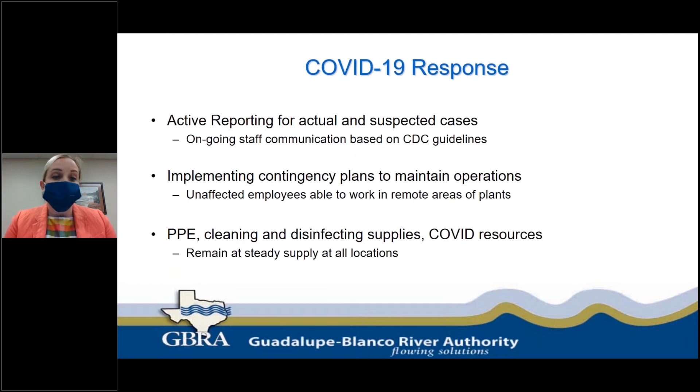And where we cannot delay or postpone tasks, including working with contractors, we have team members wearing face coverings when they're working next to other individuals. We have a steady supply of PPE, including cleaning and disinfecting supplies at all of our locations, but we do continue to stay on top of our inventory, making sure that we have a bountiful supply at each of our sites.

Our GBRA operations, our lobbies continue to remain closed to the public, and those that can telework continue to do so. We've kept a shift rotation for those reporting to work to limit personal exposure and potential virus spread. We still urge staff to conduct telephonic and remote meetings as much as possible, and in those we limit the capacity of each conference room.

We are continuing with our self-health questionnaires before we report to work, as well as temperature screenings and checking prior to any entrance to offices or field sites. We are maintaining weekly cleaning and disinfectant measures by our professional services at our sites.

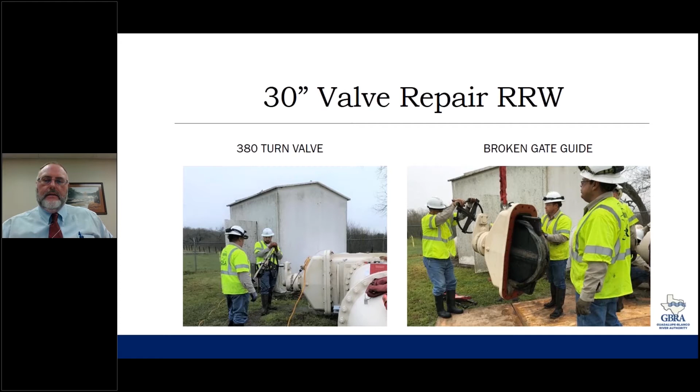First thing I want to cover is a 30-inch valve repair. This is on the regional raw water line close to Clear Springs at the pump station on Lake Dunlap. We had a valve that went bad when we started a pigging operation this spring. The valve shown to the left is a 380-turn valve. Since our guys don't have all week to open that valve, we have to put an actuator on it to help turn that valve. What we had leaking by was a broken gate guide at the bottom.

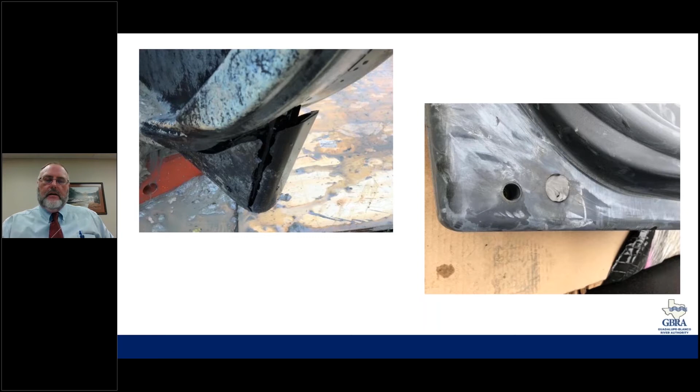The next picture shows what that is. It's a plastic guide that, because we had some debris and mussels in that valve - one that's not used all the time - caused some pressure and caused it to break. You can see the new one replaced that. We did this with in-house staff. Some of the parts we bought, and we had a representative from the company help us put that on, but it saved us a lot of money doing this in-house ourselves. We've come up with some protocol to clean that valve periodically and exercise it so we don't have those issues again.

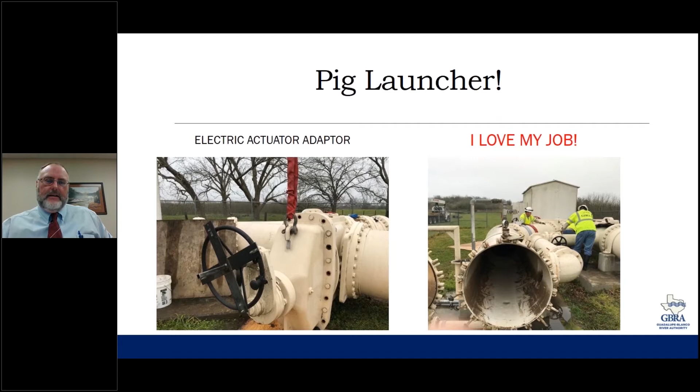You can see the adapter to the left. We put an adapter here so the electric actuator can mount and turn that valve. In red, you know, I love my job - how many people get to say they have a pig launcher in their business? I don't know that that's the proper term, but when we pig the line, which is like putting a giant Nerf ball in the line to clean out debris, we have to put that in there - it's very similar to a submarine tube. You can see the piping around. We close the door, put the pig inside there and push it through, and it goes basically 24 miles to the San Marcos water treatment plant. So it's something that everybody can't say that they do.

We had used it at the GPP pump station as well, and we've done some more inspections on the lower gates at Western Canyon. We'll use it for tanks and other things to help us save money. It's also good if we need to see something in one of our facilities, we can do it right then.

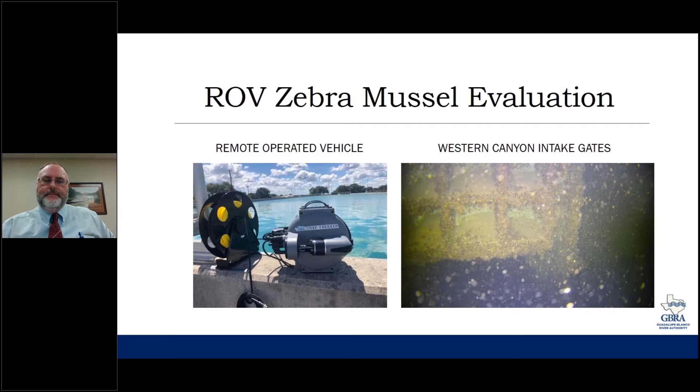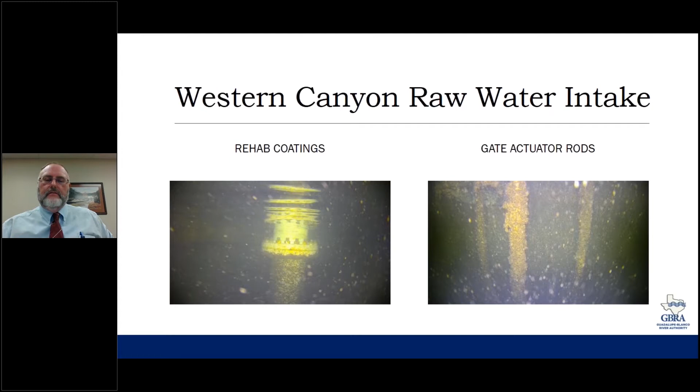You can see the zebra mussels on some of the pipes down there. They're not causing us any problems. The infestation you see here is on a steel rod that operates up and down, so they're not causing us any problem with operations, they're just there. On the left-hand side, you can see on the bottom we have a bunch of zebra mussels, and the top part we don't. That's where we had rehabbed some of the pipe and put a new coating on it. The coating does help keep them off, but eventually you can see through there, they will cover that up as well.

So we're working, engineering department is helping us, and we have hired a consultant to develop a plan for mitigation. What do we do now that we have the zebra mussels? It's not if we get them, we do have them. We worked together a plan with some contractors to remove the existing mussels before we do any chemical treatment, and we're looking long-term at adding a chemical treatment to prevent them from building up on our infrastructure and causing issues.

The reason we have to remove them is the chemicals we'll use will not only keep them from forming, but will kill the ones that are in there, and we need to remove those so we don't have a taste and odor issue like happened in Austin about a year ago. So we're ahead of the game and learning from others' issues.

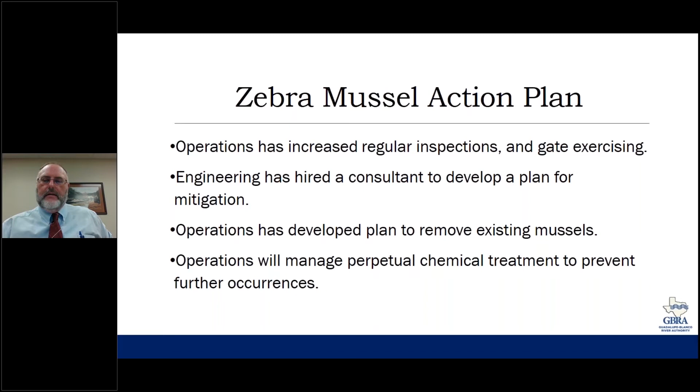So, Stein Falls Regional Lift Station. Stein Falls, as you may remember, is what we used to call the Dunlap Wastewater Treatment Plant. We've changed that name because we had too many Dunlaps. So it's that system run by Rudd.

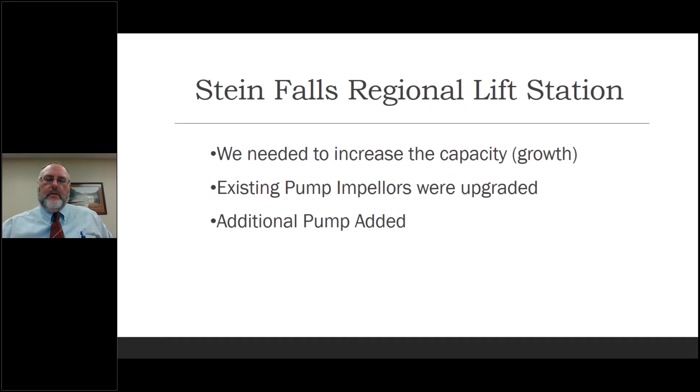With the growth we have out there, we need to increase some capacity. So working with engineering, they selected larger impellers, and we put in those pumps to upgrade them for capacity and added an additional pump for growth. To do that, we did it in-house.

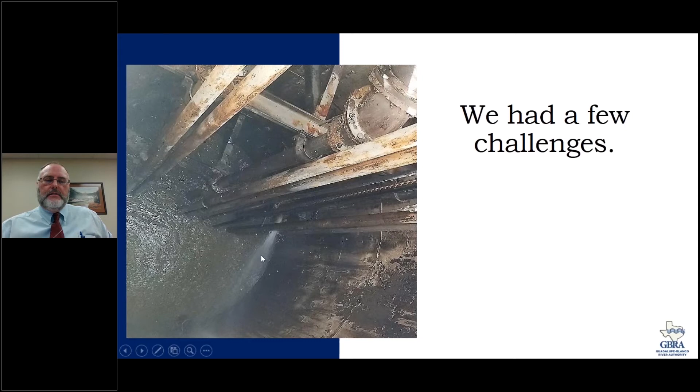And like all projects that look good on paper, we end up with a few challenges. As you can see down at the bottom, we had some water shooting out one of the pipes. So what we had was corrosion, and you can see some of the holes in the pipes, a hole there and a hole against this flange from the ductile pipe that was there.

On the right, you can see rags - baby wipes, paper towels, different sanitary wipes that people are using. They say they're flushable and will flush, but they don't go away. So they wrapped around chains. If you look to the left a little, you can see a guy standing there to give you an idea how big that pump is and how big this wad of rags is that's wrapped around there, getting caught and everything.

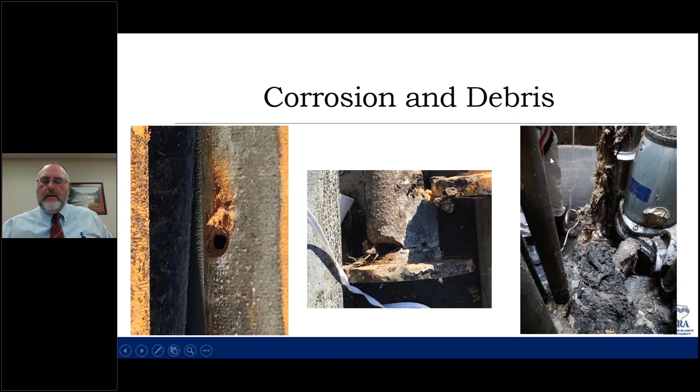So our solution, we brought our in-house crews. You can see the tube to the left coming out here where the mouse is showing - that's off our combination vacuum truck that we bought this year. The tube on the right-hand side goes all the way down to the bottom, and there's the hard hat of the man that's down in there. We cut up those rags, cut up the debris, and were able to suck that out of there to clean it out.

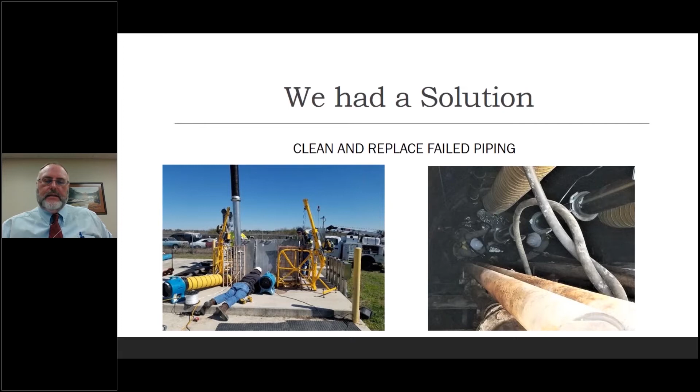You can see the cable and the harness as well. On the top left, you can see two blowers - we always have two blowers anytime we have anybody in a confined space, in case one fails we already have another one operating. You can see the hoist and winch we have for safety, with continuous air monitoring. The guy laying down is monitoring gases to protect the staff, and we're bypass pumping around it at this point.

So a few things that we did: we fabricated a drop tube, shown in blue, the new PVC. Originally from the top, the water just fell into the lift station, and that splashing would cause some off-gassing, which caused some of the corrosion we had. So we developed this drop tube setup, built it in with stainless steel brackets, and our guys welded and fabricated that.

It takes the water down to the bottom. We also, to the right, replaced the discharge piping from the pumps up with HDPE, high density polyethylene pipe, with stainless steel guides as well, and that'll help with the corrosion until this lift station is ultimately replaced at some point.

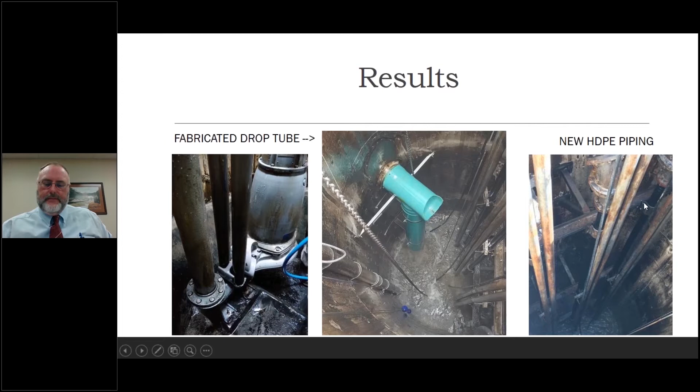We've had one inspection recently at Singing Hills, that was back several months ago. No violations were noted. All of our water and wastewater plants are meeting their parameters. We had a couple of exceedances recently, one on some flow back when it rained. We got some pretty big flow, so we had a 2-hour peak, but nothing major that's going to cause long-term compliance issues. And all of our tier 2 reporting for all the locations for large volumes of hazardous chemicals, specifically usually chlorine.

Something that's new is they're looking at doing virtual inspections, which is kind of a new thing for us. Basically they're going to review records from their office. We will send them things, they'll give us a list of things, and it'll be kind of a paperwork review on some of our water plants. The good news is they won't do that if they thought there were major problems. If we had a history of non-compliance or not meeting requirements, we wouldn't get to have a paperwork video conference review, so that's a good sign for us. We've got one set up for San Marcos water treatment plant and Luling as well, coming up in the coming weeks.

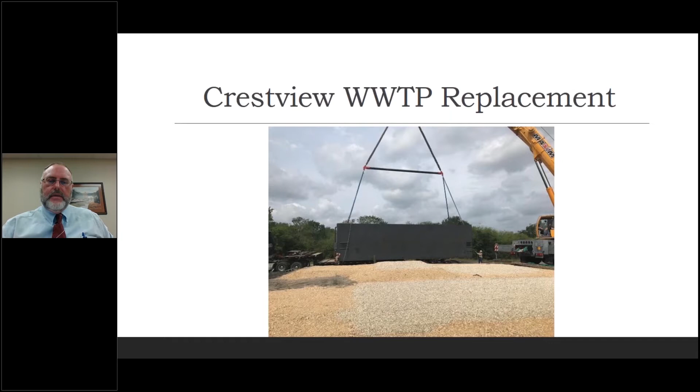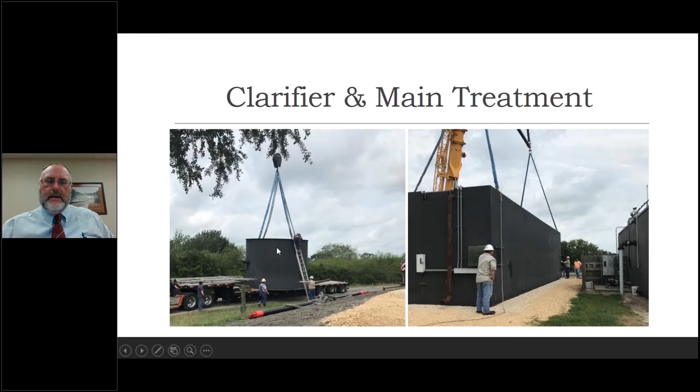That's the largest aeration basin digester. We had a pad built by contractors, built up a little bit higher. To the right-hand side you can see the old plant, and this one's a little bit higher than the other for storm waters and stuff, to keep water off of it as well. And you can see them setting it down. The clarifier is the round tank to the left coming off of the truck.

We have a crew, a couple of guys that are very good fabricators, who worked on pipeline crews before they came to work for us, and they're putting in the catwalks on top to reestablish those. Then the walkway across here is new so operators can come up on top and walk across. At this point in the pictures we do not have the handrails. When it's complete there will be handrails across everything for protecting them. They were just getting those put in at the time.

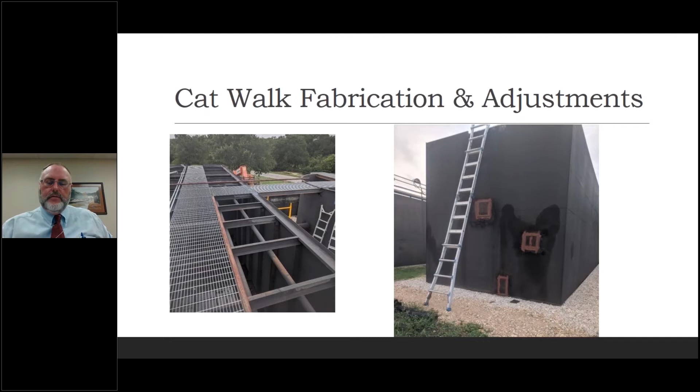The small basin to the left here, you can see that's where the disinfection will be, our chlorine contact chamber. You can see the ladders that come down so the operator can come up on top of the plant, walk around to any place he needs to clean, maintain, or test, and then circle back around—so there's a separate way to exit as well. Those again will have handrails. I think they're probably about 60 or 70% complete with all the handrails at this point in time.

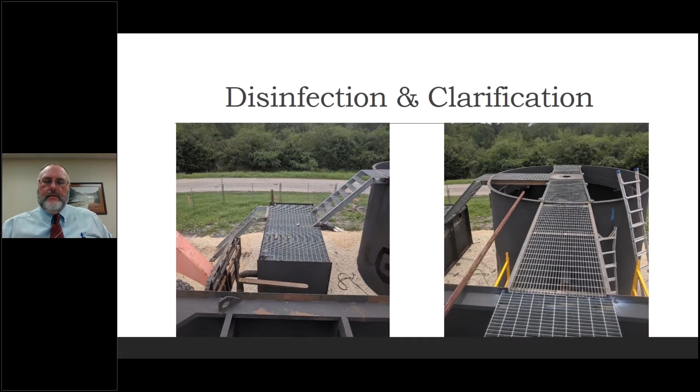Moving to the next project at Sunfield, there are 2 plants side by side, and we've been working on some rehab for one of them for quite a while. That is just complete. We started filling it yesterday on the startup.

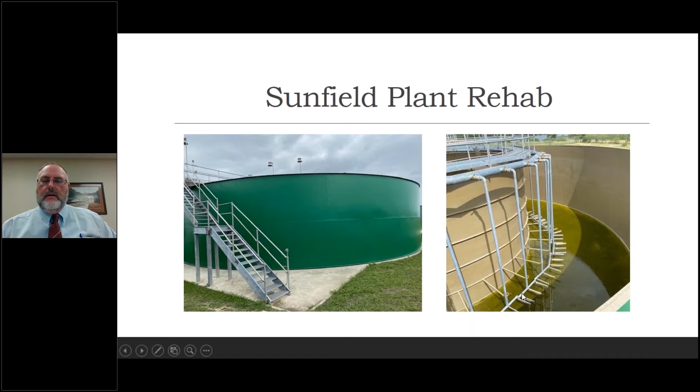The airlifts I've got the cursor on here were sent off. We bought new pipe and had them galvanized. On the bottom there's a little header with 3 diffusers, stainless steel. On the old plant they broke loose from the carbon steel, so we sent those off. Our staff welded those and put them together, then sent them off to be galvanized as well, and put those back on as part of the repairs.

You can see the new brass valves where my cursor is here. Each one of those valves we replaced while we had it down. The butterfly valve, the blue one here, we put all new valves on that for air control. There's a little 1 inch valve right here that had not been replaced at the time of this picture. We have replaced it now as well, and we're repairing the coating on the end of this airlift too.

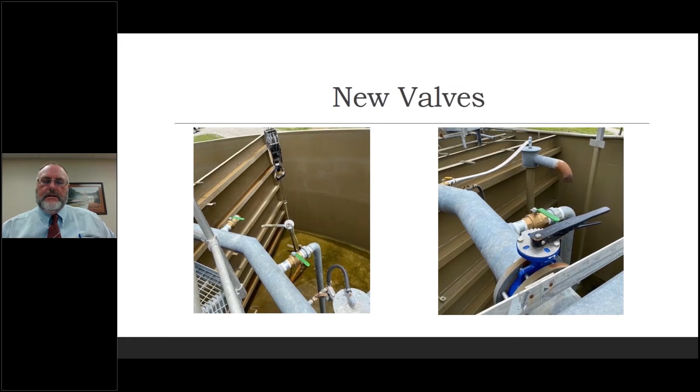This plant should have probably 15 years more life to it before we'd have to do anything. With the growth of that subdivision, this plant will be way undersized years before we get to that point. So as far as major rehab, this should take care of it for its life cycle. We could use it for other potential treatment activities, and we'll evaluate that at that time.

Shadow Creek is just a few miles away, and it's a very similar situation. They started with a small plant, and later as they grew they had to have a little bit larger plant. About 6 months ago, they ended up taking the smallest plant out and building another one, so there are 2 plants side by side.

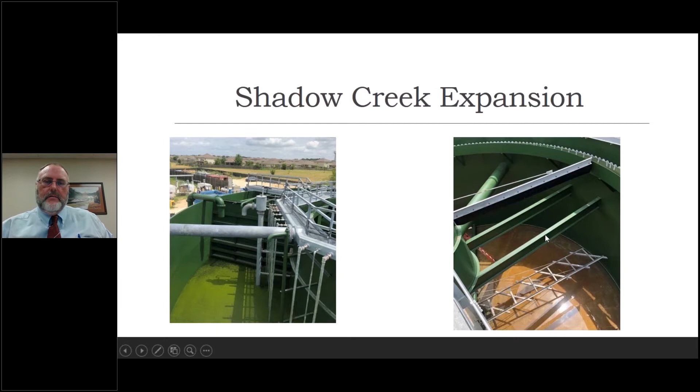This one will have up to, I believe, 610,000 gallon a day permitted treatment, and you can see the new plant there as well. This is inside the clarifier, and they're getting close to being complete on it. There are new blowers, all encased, with stainless steel housing for protection against gases, and it'll have new blowers and a new chlorine building. Here's the newer one, sized for the larger 2 plants together, and the old ones are shown right here.

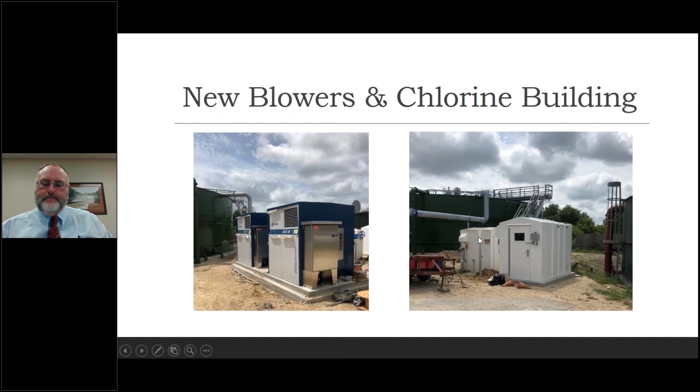At Shadow Creek also, if you can see where my cursor is, there's a little bit of a retaining wall, and this is where the old lift station was. Originally it was built kind of in a hole, and as things developed we ended up getting water in it. So later a retaining wall was built, but the lift station was just terribly undersized for peak rain events.

So they built a new lift station. You can kind of see here, it's significantly higher, above grade, so groundwater will not get into it. Capacity-wise it's built for build out plus some, with a little over 3 times the capacity of the original lift station. This is one system that when it rained, the operators reported immediately there because they were going to have some issues.

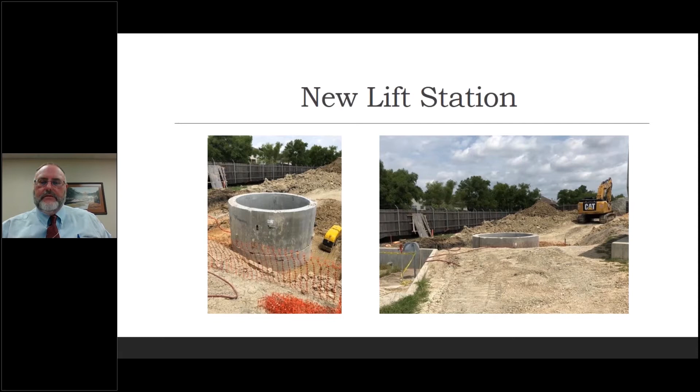Lockhart Well 3 rehab. We started working on it. These are Carrizo wells with high iron, and they require a little more maintenance. We reviewed a video and decided just to use a chlorine shock, which reduced the iron bacteria that grow down inside there. They would surge it back and forth with this chlorine solution, jet out any sand or debris that's in the bottom.

And video the well. When we were jetting, we started seeing some larger sand particles that were more like a gravel pack around the screen. So we went back and videoed real close and found 2 holes about 1 inch and one about 2 inches around, the day before yesterday is when we found those. So we're looking at getting some patches on those as well. The screen is in great shape, but this is on the carbon steel.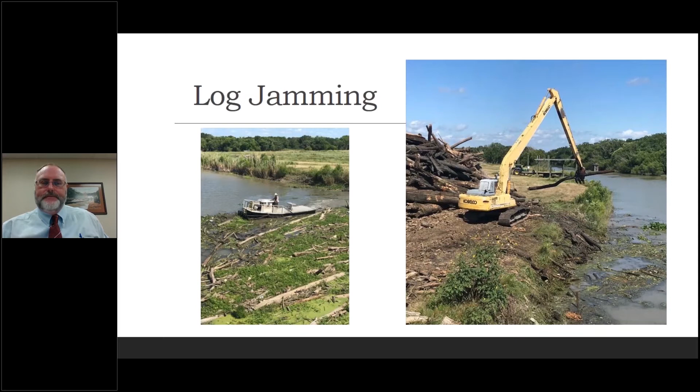Training has had to change without in-person classes. We've done a lot of stuff online that we can do through our insurance provider. There are a lot of videos as well that we can use. So here's some of the training that some of our staff have taken.

Some of the core classes, basic water, basic wastewater, we can take for licensing. Testing just really opened up about 30 days ago, and it's very hard to get in for upgrades on licenses, but there is the ability to do that as well.

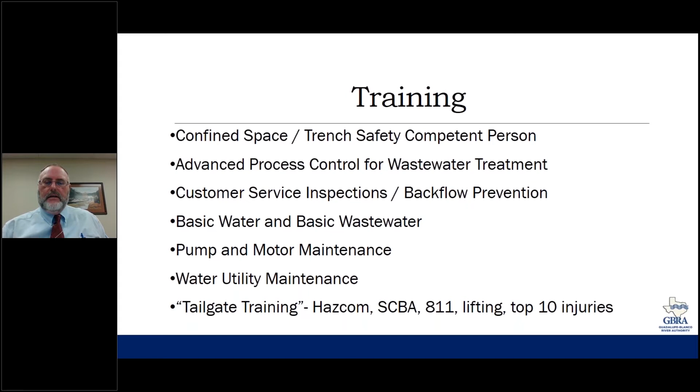We're not doing the weekly tailgate meetings and monthly safety meetings at the location like we had before because we're trying to stay separate, but we're still providing the training by handing out, and sometimes emailing, the information, having them go through it and take tests and quizzes so we can keep up on training as well.

So do y'all have any questions or anything about our operations for the last few months?

Any questions? There are no questions or comments at this time, Mr. Chairman. Thank you very much. Great presentation.

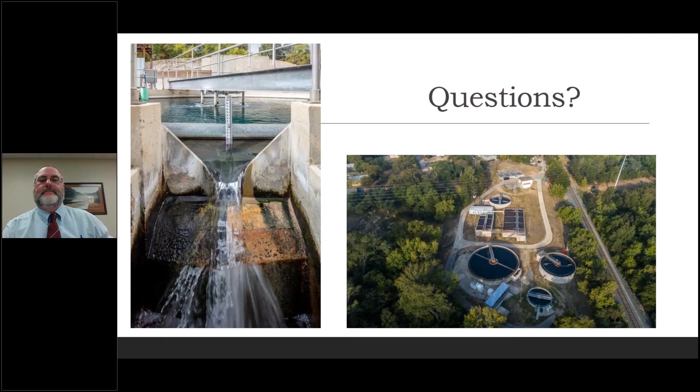Next, I'll ask Charlie Hickman to give you all an update on engineering.

Good morning, Chairman and Directors. This is Charlie Hickman. Just want to give you a status update on the activities of engineering in 2020. Start off by showing you a picture of our staff here. This was the last time we were all in the same place pre-pandemic, right here. This is a photo of us all at the Western Canyon Water Treatment Plant.

What you might notice is there's a couple of faces in here you haven't seen before, and I've been waiting for the opportunity to introduce them to you. In the back—see, I can point right here—you've got Mick Griffin, our new project engineer. He comes to us from a construction firm that managed concrete construction. We also have Brian Peterson, our new electrical instrumentation and control specialist, who came to us from Alterman Construction.

Collectively, these staff right now, everybody you see in the photo, after a closeout of several large projects, are currently responsible for managing about 10 million of design contracts for GBRA capital improvements and about 18 million dollars that are in the construction phase right now for GBRA.

On top of that, we do a lot of developer-driven utility projects. There are 35 of those that we're currently providing plan review for, and 50 of those projects that are currently being inspected by our inspections division. So this is a busy group of people right here. And just 4 years ago, all of this was being managed with a group of 4. So we really appreciate the opportunity given to us to grow this department.

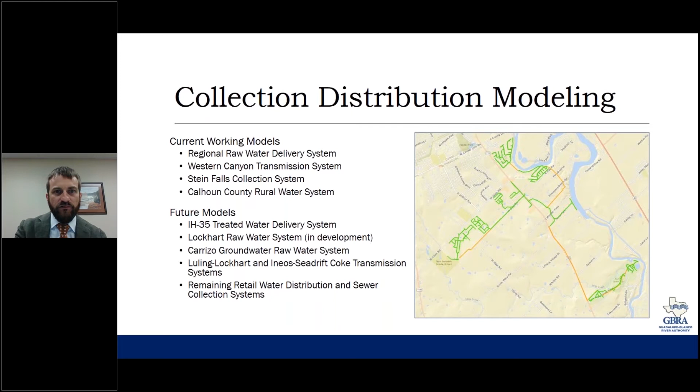On the customer service side, we've also implemented some inspections reporting. With 50 of those projects, it's quite a bit of workload, but the goal in doing that communication process on the front end is to minimize some of our communication on the back end of a project when you get down to closeout phase.

A lot of this is based around the developers who pay for these projects really only having communication with the contractors they work with, and GBRA inspectors have direct communication with those contractors. So part of the reason for implementing this process was to increase that communication amongst all parties, to where we're putting out a weekly report that gives the developers a sense of what GBRA crews are seeing out in the field on a weekly basis as they communicate with their contractor.

I talked about having 50 projects in the construction phase, and that may be several projects within one system. Like we have a subdivision we're providing inspections for named 4S, and right now there's 4 different housing units concurrently under construction. So while that may seem to be one project, you're typically dealing with a different design engineer and sometimes a different contractor. So it's really individually managed units that we're providing these reports for.

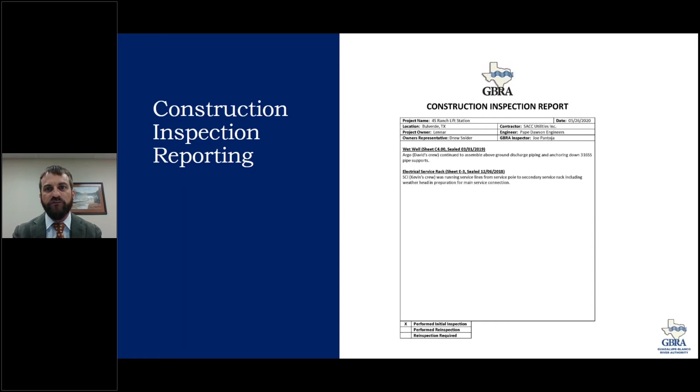I'll move on to touch base on some of our projects, starting with the Carrizo Groundwater Supply Project. This first section is about the status of some of the shared facilities that we're implementing with the Alliance Regional Water Authority. To remind you, our contract with Alliance puts them directly responsible for doing the design and construction of really all of the facilities, starting at the water treatment plant and working all of the pipelines that lead up to the individual customer delivery points.

So pipeline segments A and B, the east-west projects, are currently at 60% design that's been submitted for owner review, and we are participating with Alliance and providing some comments on that review process. Pipeline segments D and E are out there completing preliminary engineering and wrapping up field work to move into final design for those segments.

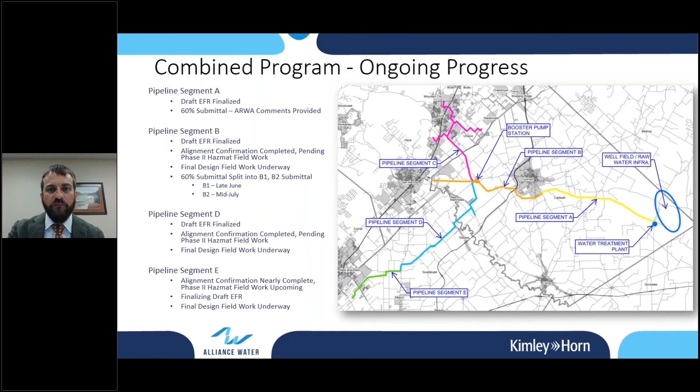There's a booster pump station located right here, very close to where our San Marcos water treatment plant is. That's also at 60% design and in review, along with the water treatment plant, also at 60% design. So there's been some good progress on the design activities. The inline elevated tanks are currently in preliminary design.

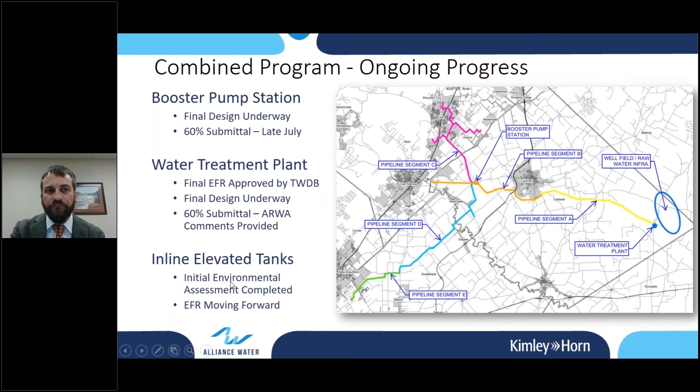So from a scheduling perspective, the bars in blue are the design and construction related activities. Just to touch on a couple of things that have changed since the last update on the status of this project: when we first discussed this back in preliminary engineering, the water treatment plant was really on the critical path as the last thing to come online before we could start water deliveries.

Right of way is always a challenge with every project, and due to some issues acquiring the right of way, there has been a little bit of a delay in a couple of the pipeline segments, which has now put the pipeline segments at the far end of the project on the critical path. We still feel, based on the status of the project, that providing water by June of 2023, our contractual obligation and goal, is still definitely feasible. It just changes the components that will come online last.

The only component you see here, segment C, that's past that goal is the segment that's strictly for Alliance customers. So all of the GBRA segments still appear to be on target.

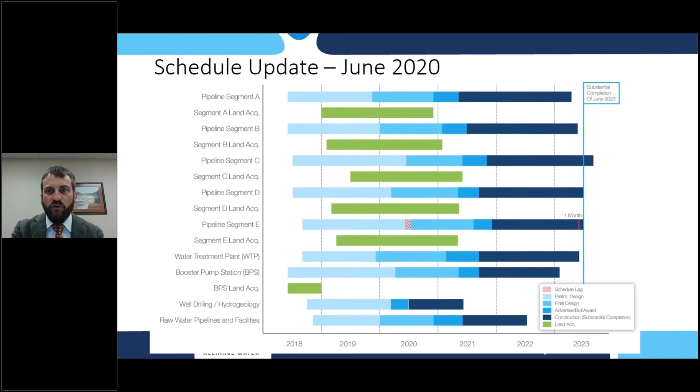Right of way had some float built into the schedule, so we're not feeling like we're in threat of missing the targeted deadlines — the green bars are right of way. The earlier segments are expected to wrap up towards the end of this calendar year, moving into the second quarter of 2021 before Alliance needs to wrap up the remaining right of way segments. That's still 9 months out and a very achievable goal, but there are a lot of parcels to be acquired. This chart shows the general status of right-of-way acquisition.

There are 178 parcels, a really large number required for this long length of pipeline. The approach Alliance is using: before they make any initial offer on acquiring the easements, they have an appraisal prepared. About 60% of those appraisals have been done at this point.

With that, about half of the parcels have received an initial offer letter to the landowners. That initial offer letter really starts the clock for a final deadline for either acquiring the easement or getting into eminent domain proceedings, which everybody tries to avoid as much as possible. At this point, about 13% of the right-of-way has been acquired. So it is moving along.

This was last month's update. We have a monthly project management committee that meets to review the status of this, and we're meeting on Friday this week to get our latest update.

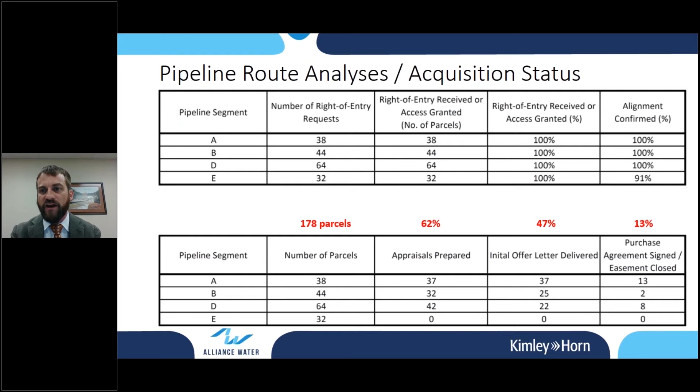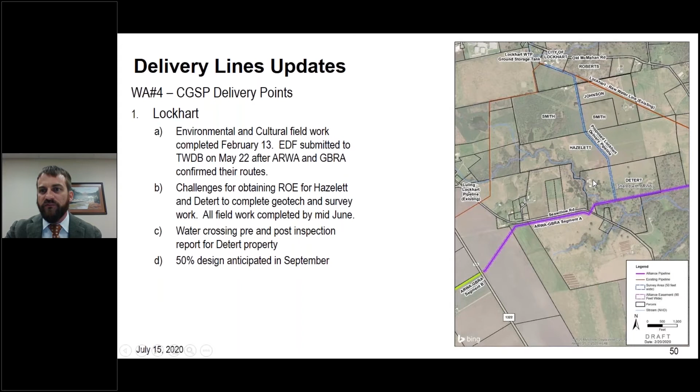We did have some slowdowns in obtaining the right of entry for that, but we've completed that and completed all of the field work for survey and geotechnical. We're anticipating, based on that field work, having a 50% design for review submitted to us in September.

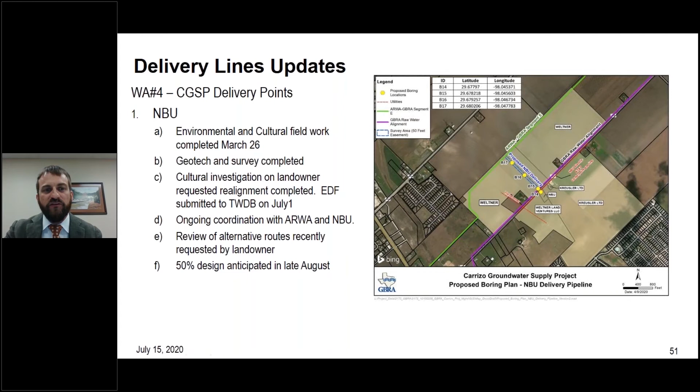For the smaller leg to New Braunfels, the status is pretty similar — it's slightly ahead, and we've completed all that field work. We are having some negotiations and discussions with the landowner about potentially adjusting this route, but we still anticipate a 50% design for this pipeline in August, next month.

On the well fields, just to remind you, it's really split into two different packages. There's a design and construction package for the drilling of the wells themselves, and Brian will give you an update on that in an upcoming item. Then there's a separate package for all of the pumps on the surface and all of the pipelines that will get the water to the shared treatment plant with Alliance.

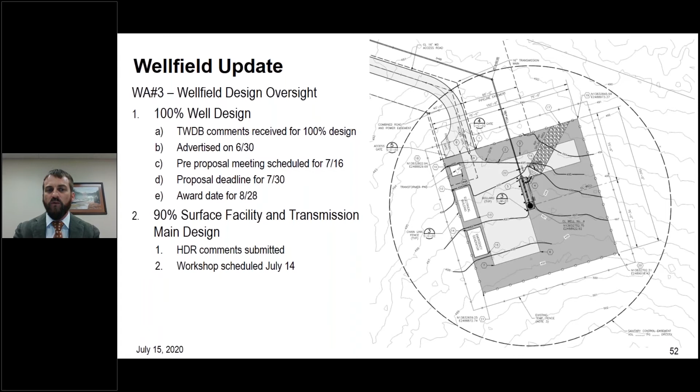We're really ahead of where we need to be on design of that. We've got a long length of float from when we're going to complete the design before we actually need to bid the project to meet our target of having all these raw water systems in the ground and up and running by the third quarter of 2022. Just yesterday we had a review with our consultant to go over the status of the 90% design and provide them our comments, so we're ahead of where we need to be from a design perspective on that piece of the project.

There's one other component I didn't provide a slide for, but we're also doing some upgrades to the high service pump station at our San Marcos water treatment plant, where we will pump that water up our existing I-35 treated line to our Goforth facility. We're also anticipating in August a 60% design for those improvements. So any questions on the Carrizo project before I move on to some of our other projects?

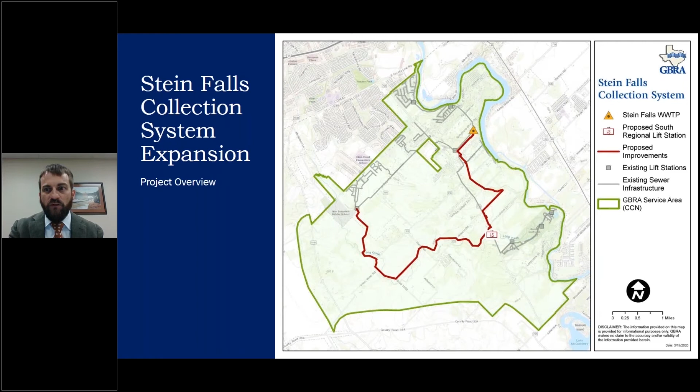To get everything online, because we have a tremendous amount of growth in the system, probably more than any of our other areas. Even seeing the impacts of COVID, we've been monitoring that, and the developers providing projects in this area have given us no indication that they're slowing down at all. Just to show you how many different inquiries we're dealing with.

So that system is really growing, and we definitely have a need to get this project in the ground as fast as possible still, even with the impacts of COVID. So we're progressing that as fast as we can.

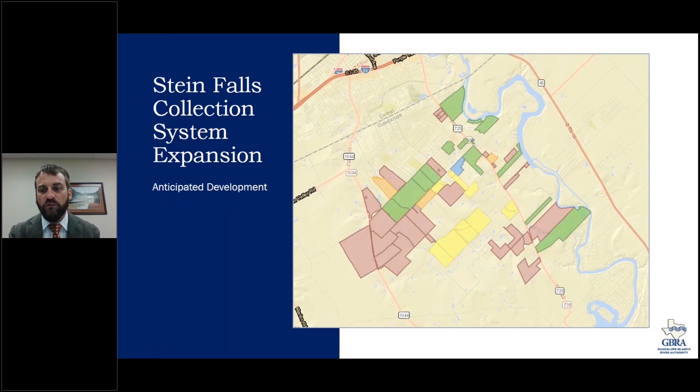Similar on the other side of the river—that area we were just discussing is our existing service area shown right here. We did apply last year for a new CCN that would dictate our service area on the opposite side of the river, shown in green. We've designed, completed, and bid a project to implement the collection system that would serve that first part of that service system. That's known as our Dietz wastewater project.

The bids we received were $2.1 million for the lift station and $3.3 million for the associated pipelines. We provided notice to proceed for that project back in June, and it's a 10-month timetable, so we expect to have that system online in April of next year, ready to provide service. We also have active negotiations with the developers in that area about obtaining service.

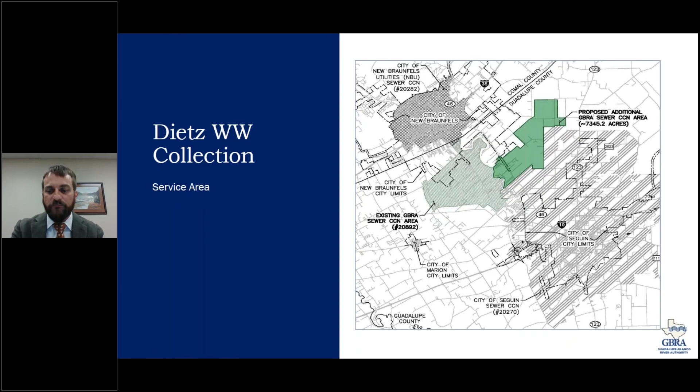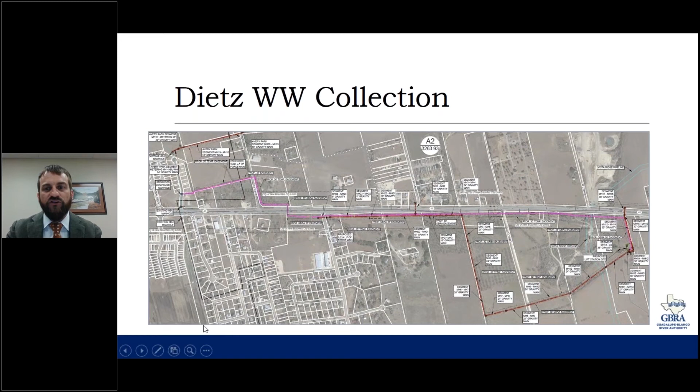A couple of quick updates on projects I don't have slides for. In Calhoun County, for the Port Lavaca water treatment plant, the city council engaged a third-party consultant to review our consultant's plan for implementing that project. They came up with a phased approach for how the plant could be implemented on a much longer timetable than building it all at once, which is what GBRA had proposed for cost efficiency. We've had the opportunity to review that report, and tomorrow we're giving the city council an update on GBRA's findings. We do have some differences of opinion on the water quality measures proposed for the plant, as well as the delaying of certain critical infrastructure like electrical systems, which we'll update them on tomorrow.

With Calhoun County, they recently obtained a grant from the Matagorda Bay Mitigation Trust, part of a settlement with Formosa. That settlement outlined $10 million of funding for implementation of a park at Green Lake, and also earmarked $2 million for hardening of erosion concerns where Green Lake overflows into our canal system. We just met with the commissioners this week and laid out a process where we would leverage our technical expertise to manage that project and utilize our consultant to provide design services. We're currently negotiating a memorandum of understanding with the county to provide those services, and we're happy we can utilize that funding to help improve our canal system, our lower Guadalupe diversion system.

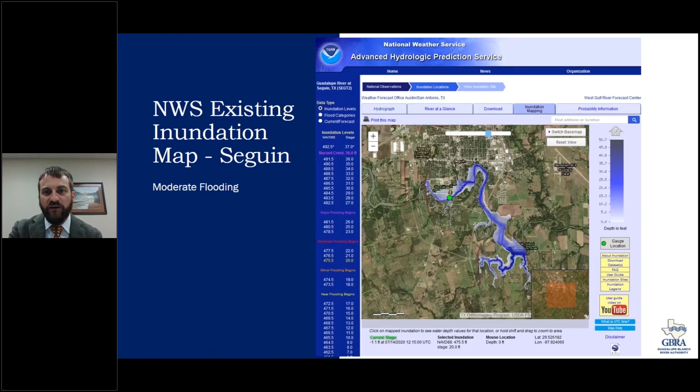You can see, at different flood levels, it provides an inundation map with depth — the darker blue you are, the deeper the water is. Here's an example of a moderate flood moving into a more major flood, and here's a demonstration of what the flood of record looked like, which would be the '98 flood for this area. So we want these types of products for the entirety of our hydroelectric system, for better communication during these types of events.

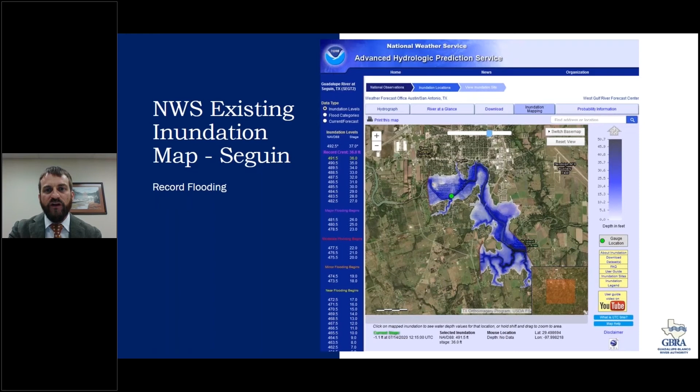But there's a number of challenges we're trying to overcome. Because of all the challenges in developing those models, that was our main goal in getting involved with FEMA several years ago. We entered into a cooperating technical partnership with FEMA to get all the technical work done to develop those models, and it's something we've been doing in phases over time.

You may recall back in fiscal year 15 and 17, we obtained grants from FEMA to go out and do surveys of the lake bottoms to help improve those models. One of the deficiencies in the models was that they did not have very good survey data for the lake beds, which can affect the height of the inundation during these different types of flood events. We've completed those efforts on all 6 of the lakes.

Then in fiscal year 18, we got a grant award from FEMA for the modeling and inundation mapping for Lake Dunlap. Following that, in fiscal year 19, we got the grant award for the remaining 5 lakes.

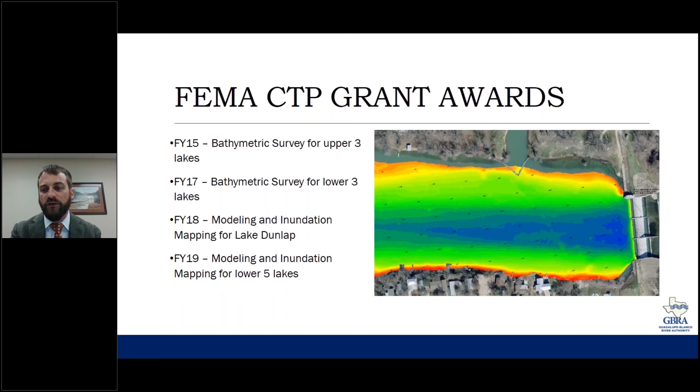During that time, however, FEMA on their own initiated a modeling update of this leg of the river system, so we had to put this project on hold while we waited for FEMA to complete those modeling updates. They have now completed those updates, and we are looking to move forward and start turning those models into inundation maps.

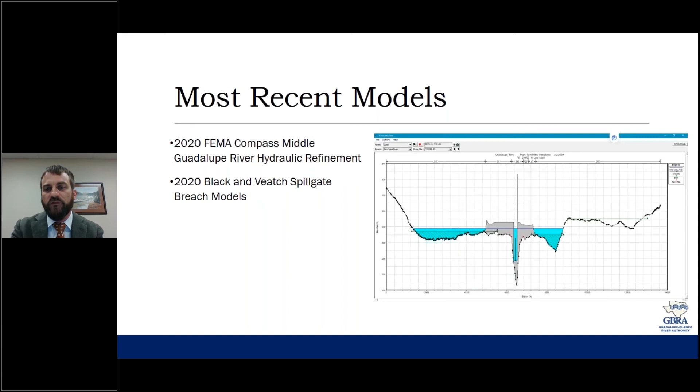Really what we're going to be doing is combining two different modeling efforts: that 2020 completed FEMA modeling effort, and the very robust modeling we did with Black & Veatch to model what would happen in the event of a spillgate breach following the failure of Dunlap. Combining those two models into one is really what we need to do to provide a better understanding of the inundation maps.

The benefit of the Black & Veatch model is that all of the overland areas in the riverbank are modeled as two-dimensional, whereas a standard river model is just one dimension. That two-dimensional model lets you look at more complicated overflow situations.

We had a good demonstration of this near Turtle Lane on Lake Placid. With these 2D models, you can start to see when flow actually exits the river channel during a certain event. So with these models, we'll be able to define for the emergency managers at what flow rate you can expect water to start to leave the river channel, and how deep it's going to get over your access roads. They'll have an understanding that when we report a discharge we're seeing at our dams, they'll know how much time they have to respond to get people evacuated from certain areas.

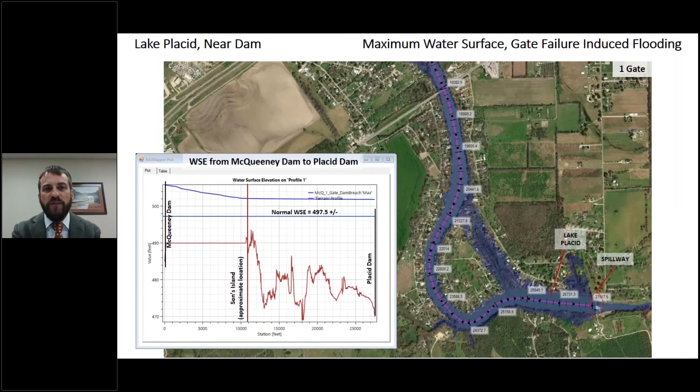So what we will do with this project is run these models at every range of flows we would expect to see in every gate setting on our hydro dams, so that we have a whole series of different inundation maps we can provide to them as these events develop.

So we have already issued an RFQ for this project as well, and the submittals will be due on July 20th. This project is entirely funded with that FEMA grant, but GBRA will be providing the administration of implementing that project. So we do expect to issue that contract with your blessing by the end of this month as well.

All right, we have a motion and a second. Is there any discussion? There are no comments or questions, Mr. Chairman.

Mr. Bull, would you poll the directors? Yes, Mr. Chairman, this is Tom Bull. Director Hermes, Aye. Director Fogel, Aye. Director Matthews, Aye. Director Motl, Aye. Director Meador, Aye. Director Carbonara, Aye. Director Herring, Aye. Chairman Patillo, Aye. Mr. Chairman, there are 8 votes in favor and none opposed.

Motion carries. Let's move to item 10, consideration of and possible action authorizing the general manager, CEO, to negotiate and execute a contract with the highest ranked bidder for the construction of the Carrizo groundwater supply project well drilling package.

I'll entertain a motion. This is Don Meador, I so move. I have a second. This is Kenneth Motl, I'll second it. All right, would you lay out the motion?

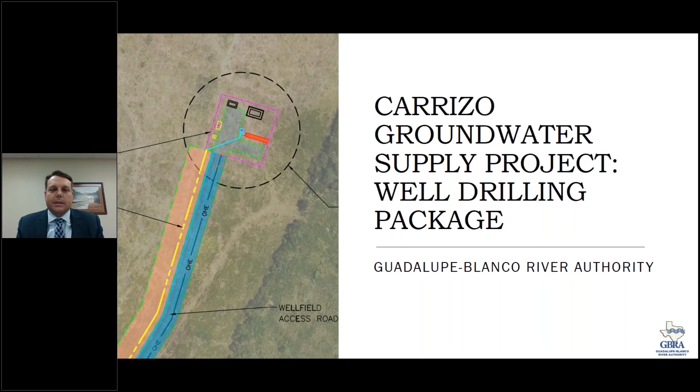So the package itself has contained 7 Carrizo aquifer wells being drilled, including development testing. We'll collect some water quality sampling, disinfect the wells, get video logging from that as well, and verify the alignment of the wells. These wells are about 1,200 feet deep, they range, but roughly 1,200 feet deep. This construction package also includes building of flexible base roads for access to those well sites.

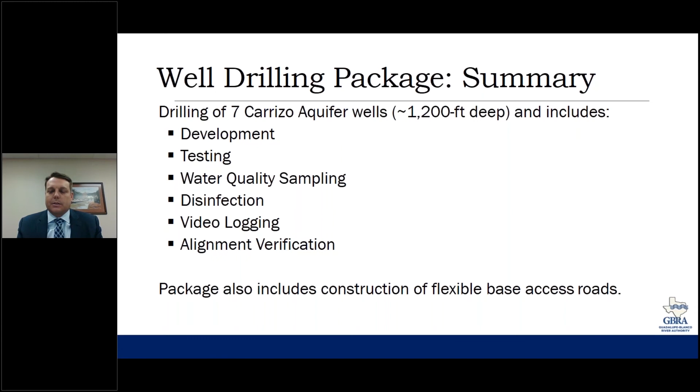That'll give us the water quality information we need to get to the water treatment plant designer that Alliance is managing. Concurrently, Alliance is drilling their first 4 wells, and they will have some of the more shallow wells. So between our water quality information and the water quality information from the Alliance group, the water treatment plant designer will have a good range of values for what is expected out of the aquifer.

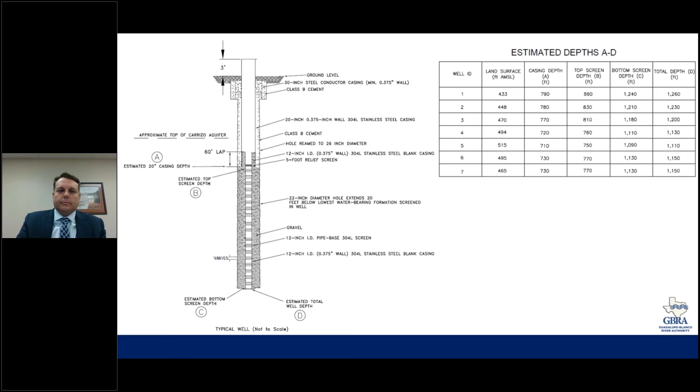We have gone through the TWDB review process as part of the SWIFT funding. They reviewed the contract documents before they went out for bid, and we received their comments and addressed them. With that, we do have this action item for you. Any questions?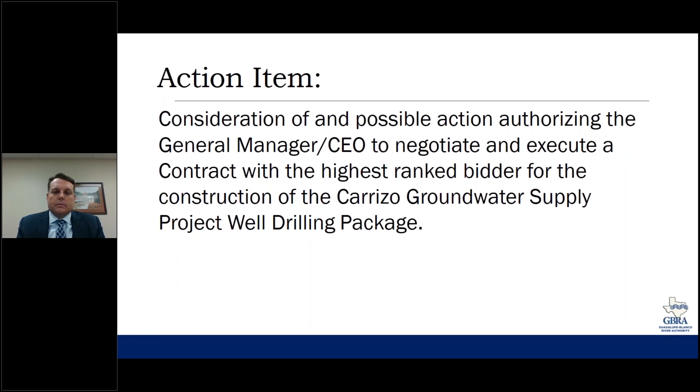That's a good question. I'll go back to here. Actually, this - there we go. So this part of Caldwell County is actually regulated by the Gonzales County Groundwater Conservation District. The Plum Creek District line is more over towards this area here. So this area of Caldwell falls under the Gonzales County Underground Water Conservation District. We do have all the permits necessary for this project already from the Groundwater Conservation District. We are dealing with only one entity in terms of regulatory.

Well, I'm sure that you checked for all the snakes, but that area you're saying is in Caldwell County under the Gonzales Groundwater District is also claimed by the Plum Creek Conservation District underground. And there was admitted difficulty in the laws, but they got 2 entities, and that has not been resolved to my knowledge. So it's going to end up in the courts deciding who's got the jurisdiction. But you say you got the permit from Gonzales.

We do, yeah, but there's been no communication with the Plum Creek Conservation District. Not that I'm aware of. I'd sure check that out before y'all go too far into that.

Thank you. Are there any other comments, questions? Not at this time, Mr. Chairman. All right, Mr. Bowl, please poll the directors.

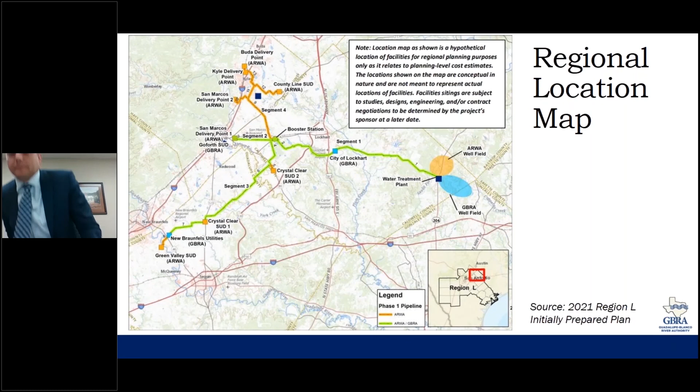Motion carries. Let's move to item number 11, consideration of and possible action authorizing the general manager CEO to negotiate and execute a lower basin firm water supply agreement with Ineos Nitriles USA LLC. I'll entertain a motion. So moved, this is Oscar. Have a second. This is Don Metter, I second. Thank you. Daryl, will you or Tom lay this out? Daryl.

I drew the straw for this one.

Good morning, directors. This is Daryl Nichols with GBRA. So we've been working with Ineos on a contract that they have to purchase raw water from GBRA down in our lower basin area. We've been working on this contract for some time now. The current contract had expired in February, but we extended it just a bit so that we could complete this.

The key thing on this agreement, though, is this also incorporates our ability to do the lower basin project and be able to use this contract and the revenues from it to support that. This is going to be the model that we use for other entities in the basin, in the lower basin as well, for developing our lower basin off-channel reservoir in the future.

This contract also starts the process of Ineos paying for the full amount of the raw water that they're going to be allocated for over a period of time. Ineos is taking some time to negotiate with this private entity who's headquartered over in Europe, but it's been a successful endeavor, and it's going to be a model that we use for other entities, other industries in the lower basin as well.

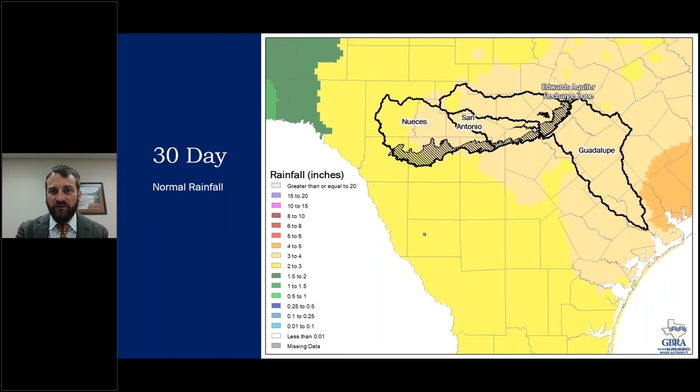Our normal 30-day rainfall for the late June, early July periods is in the about 3 to 4 inch range for most of our basin, and we've really seen more about 1 inch to 1.5 inches of rain in some areas, and a little bit more down closer to the coast. But we've had a really dry month and extremely hot conditions.

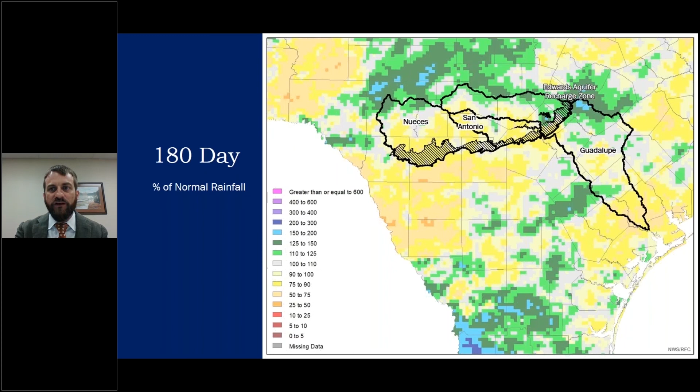Over the last 180 days, we're not in too bad of a deficit really across the basin. We've received 75 to 90% of our normal rainfall for this year. But with the extremely hot conditions, you're seeing some well below median flows across most of the river, pretty much throughout. The inflow into Canyon Reservoir right now is only just under 30 CFS, and we're releasing around 60 CFS, which is the minimum release for our water supply. We are still in the drought provisions of the permit for Canyon.

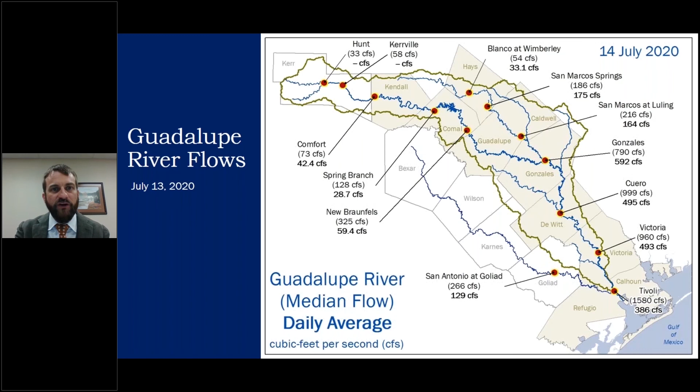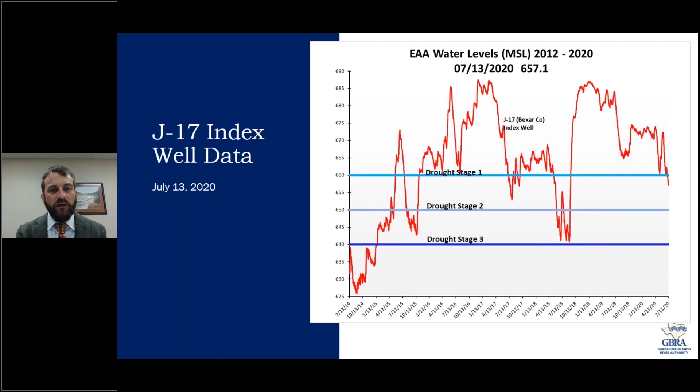With that lack of rainfall across the recharge zone and getting into peak summer use, the J17 index well has gone down below the trigger for drought stage 1. So for the first time in 2 years, we're in critical period stage 1 conditions for the Edwards. And a reminder of what that looks like: that again is based on the 10-day average getting below 660 in that index well, and that requires that all of the Edwards pumpers have a 20% reduction on their withdrawals.

And so in order to implement that, entities like SAWS and New Braunfels and others have implemented their stage 1 watering restrictions to try to curtail that use. And so we'll watch the aquifer. If it declines another 10 feet, then they would get into the stage 2 condition.

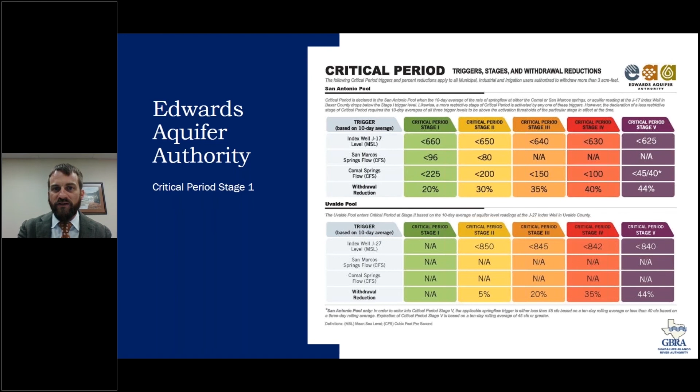Looking at the Comal Springs, it still remains above the trigger for stage 1. And we're still tracking really close to the average spring flow for this time of year. The springs are currently flowing at 260 CFS, and you can see that the stage 1 trigger is based on the 10-day average getting down below 225 CFS. So we're still a ways above that, but the critical period was likewise triggered just because of the J17 level.

Canyon is still in relatively good shape with the dry conditions. We're about 1.5 feet below conservation storage.

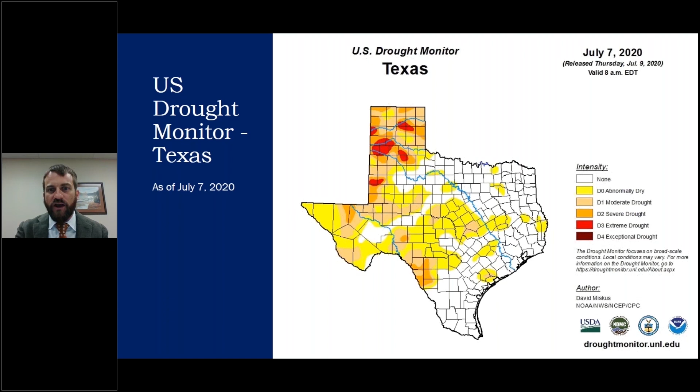Looking at the drought monitor for the state, most of our basin is still not in a drought category, but if we continue on with these conditions, we can expect that to develop. You can see some of the surrounding hill country regions are starting to get pushed into that dry category, so drought's starting to spread across the state with the hotter conditions.

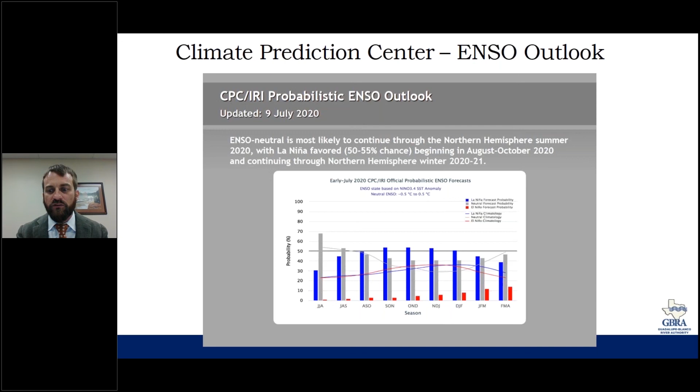Looking at the outlook right now, they are predicting that when we get into the winter period, there's a 50 to 55% chance of La Nina conditions developing, which in the winter and fall period can lead to a drier forecast for Texas. So we'll see what happens there.

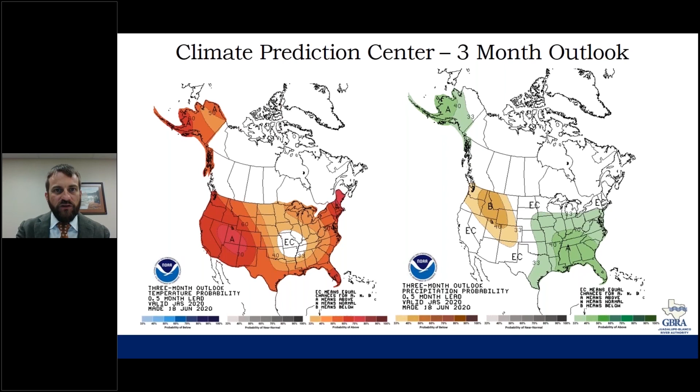So any questions on the drought report? There are no questions at this time. All right.

So that brings us to the point of the meeting that we will move into executive session. I show that it's 11:24 a.m., and I would suggest that we take a 16-minute break, and at 11:40, let's be prepared, if it's all right with everyone, to go into executive session.